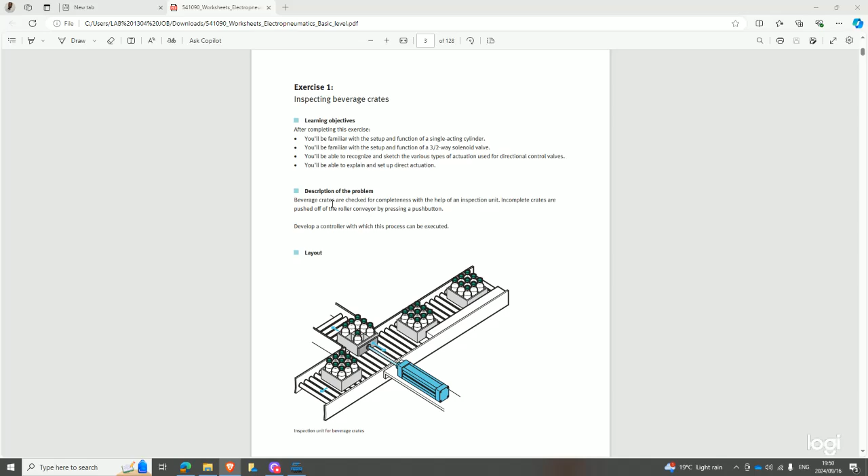As I just said, this is quite similar to pneumatics, but the difference is that now we are introducing electricity into the system. We are using electricity to actuate the pneumatic circuit. Now, to see how we do that, I want us to go over to FLUIDSIM. If you still remember, in pneumatics we've been using mechanically operated and pneumatically operated push buttons. In electro-pneumatics, we only deal with solenoid operated push buttons, right?

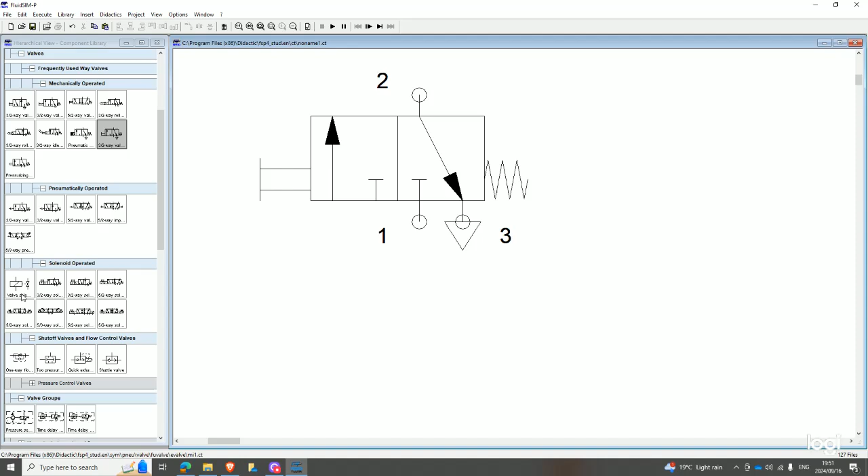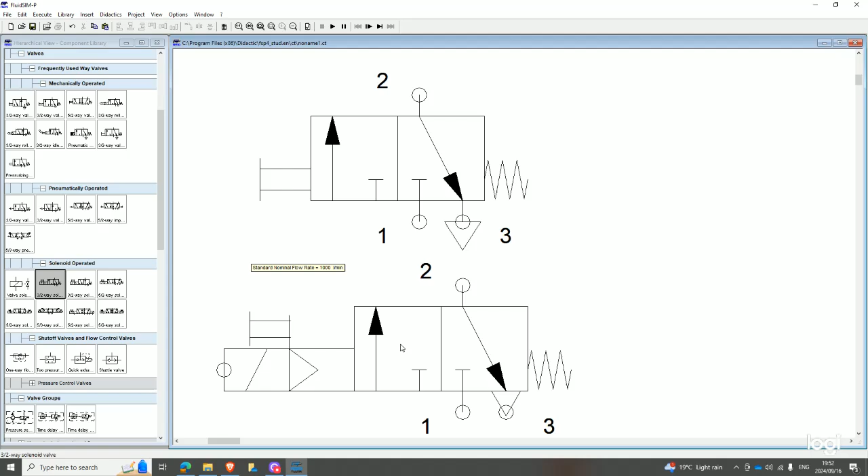Let me just make a comparison. Here in pneumatics, we used to have a manually operated 3-2-way valve that's normally closed. When we are dealing with electro-pneumatics, we also have a 3-2-way push button, but instead of being manually operated, it's electrically operated, which means on the side here, for it to be actuated, it has to connect to an electrical signal, right?

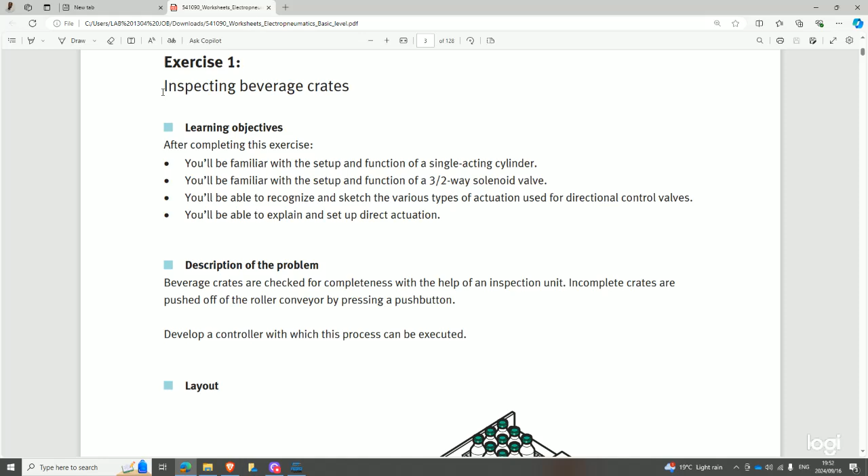So things are quite similar, but I'm gonna keep on emphasizing this: the only difference is that we are using electricity to control our circuit. So going back to our exercise 1, the process is inspecting beverage crates. They are saying beverage crates are checked for completeness with the help of an inspection unit, right?

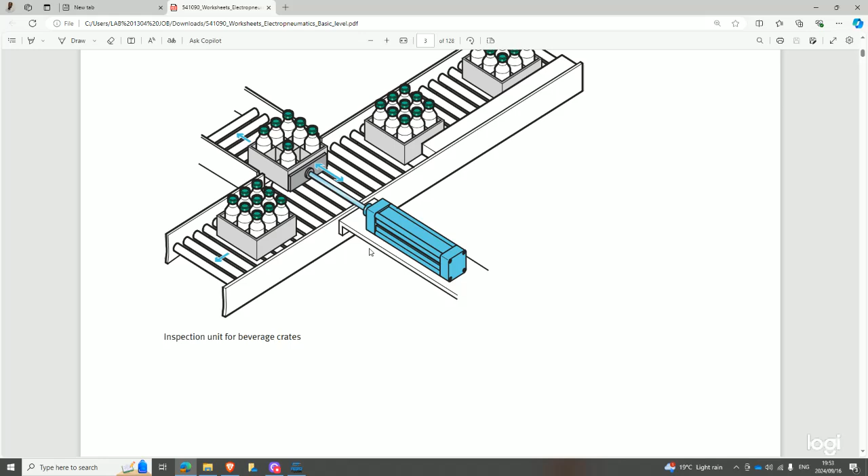And they are saying incomplete crates are pushed off the roller conveyor by a push button, and develop a control system in which this can be executed. So that's our description of the problem, right? What I also want us to catch is that, similarly to pneumatics,

the most important aspects here are the description of the problem, the description of the process, and the general conditions or parameters. Moving on to the description of the process, beverage crates are inspected at a manual workstation. After pressing a push button, incompletely filled beverage crates are pushed off the conveyor belt by a piston rod of a single acting cylinder. So first keyword: we already know that we are using a single acting cylinder.

And they're saying when the push button is released, the piston rod is retracted to the rear end position. So if you look at this, after pressing a push button, the incompletely filled beverage crates are pushed off the conveyor belt with the aid of the piston rod, which basically means that when the operator... let's stick with the operator.

When the operator presses the push button, the cylinder advances to push the incompletely filled beverage crates off the conveyor belt, right? And then as soon as the operator releases the push button, the piston rod retracts on its own to the rear end position, right?

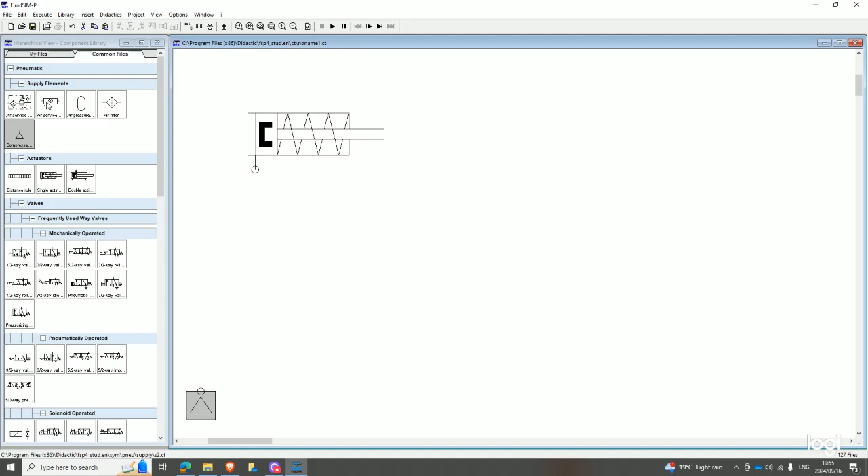So if you are controlling a pneumatic circuit, you always need to have your air service unit. You always need to have your compressor to supply the air, and then you need your air service unit so it can filter or clean the air, right? And then, as I said before, they already told us that they're using a single acting cylinder, right?

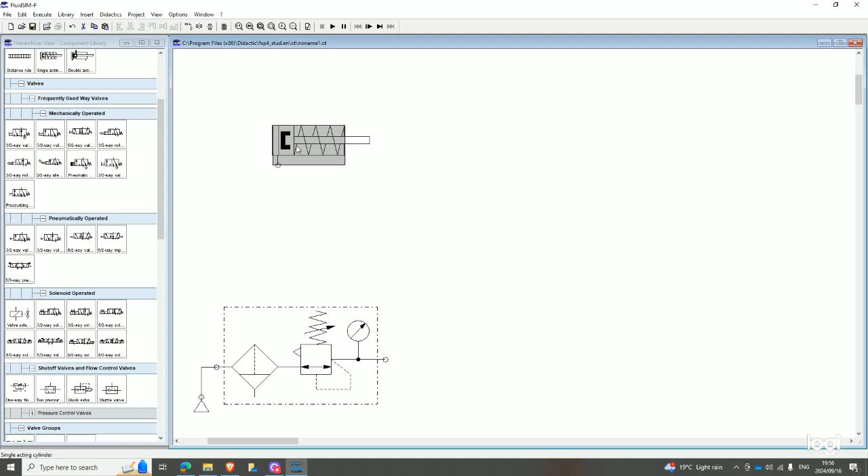And as I said, when we are dealing with electro-pneumatics here, we are dealing with solenoid operated valves, right? If you still remember, we have different kinds of solenoid valves. We have a 3/2-way solenoid valve that's normally open or normally closed. We have a 5/2-way solenoid operated valve. They only differ in the sense that the solenoid operated valves are used to control electronic signals, right?

And the mechanically operated ones are used to control pneumatic circuits, right? So since they said we're using a single acting cylinder, you should be aware that every time you use a single acting cylinder, you should have a 3/2-way valve. So now we're gonna get our 3/2-way. But we have two different kinds of 3/2-ways: a solenoid operated normally closed 3/2-way valve, and a normally open solenoid operated 3/2-way valve.

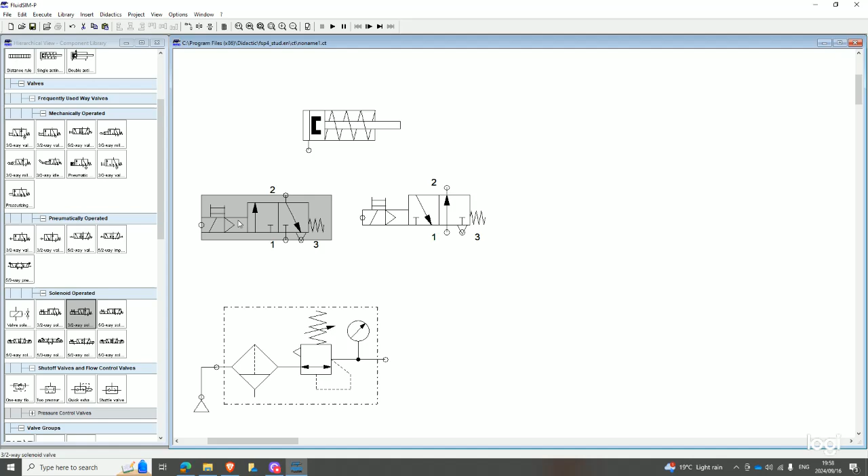So this one is the normally closed one, and this one is normally open. Going back to our statement, they said after pressing a push button the single acting cylinder advances, which means it begins in the retracted end position. If we use this 3/2-way valve, it's gonna allow air straight into the cylinder before we actuate it. So we are going to use this one to ensure that the cylinder remains in the retracted end position at the beginning of the process.

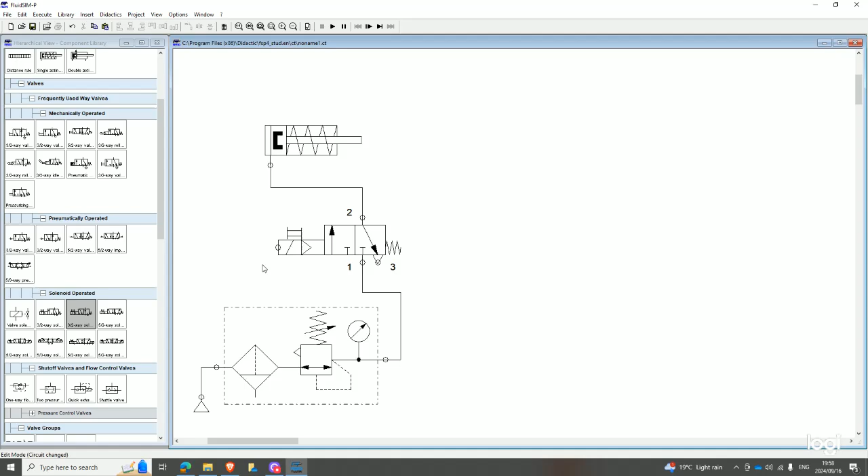So now I'm just gonna remove this, connect this here, and then connect this to my cylinder. And then I deal with the electrical aspect of my system. As you can see here, there's no push button; it's just where you put your electrical wires. So we need to put in the push button that you wanna press. Our push button is electric, right?

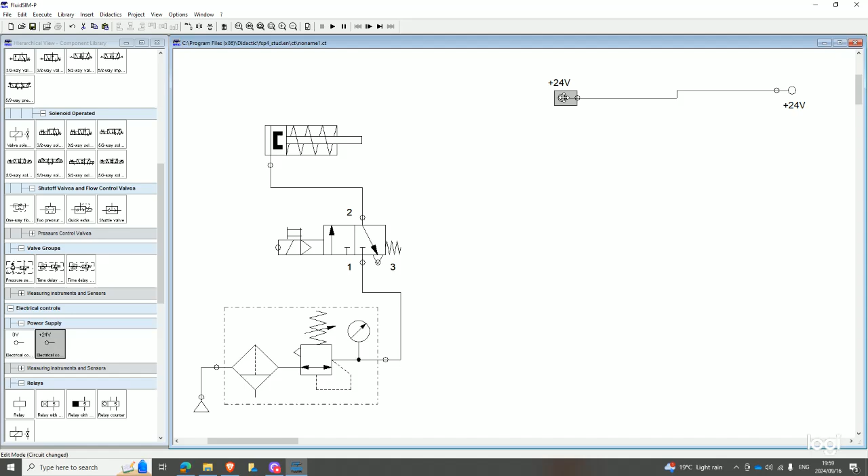So first we need to get a power source. Then you need to rotate this by 180 and connect it straight, right? And then you need to get your ground, or your 0 volt. Also take this, rotate it 180, connect it, and make sure you place it carefully.

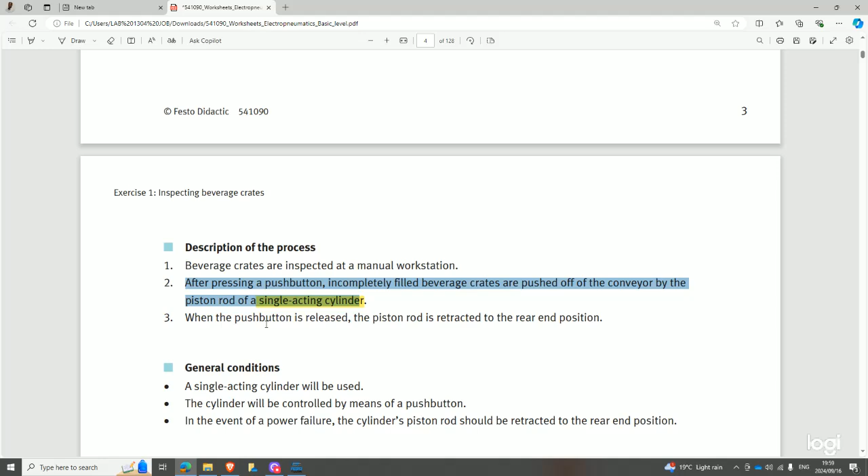So here they said we need to press the push button, and that's when the cylinder advances. And when we release the push button, the cylinder retracts. The electric push buttons are here. We have different kinds of push buttons that we'll go through throughout the course of this exercise.

But now, this is the push button. So what we do is take our push button. This is the kind of push button that closes when you press it, but as soon as you let go of it, it opens, right?

So after completing the exercise, I'll take you through how the other push buttons work, right? So now, to make sure that our electric circuit communicates to our pneumatic circuit, we need to get a solenoid, right? A solenoid valve. As I showed you, these cylinders are connected to a solenoid valve. So this is what a solenoid valve looks like. And then you connect it to the push button, and then you connect it straight to the ground, all right?

And then to ensure that they communicate, we label this, let's say, Q0, right? Q0. So now this indicates that this solenoid is located here. As I showed you when I was starting on the image, the solenoid is usually located at the front of this 3/2-way valve or whatever valve. And this indicates an electrical connection, so we're just trying to indicate that there's an electrical connection between them. And then we also label this as our push button, so we can say PB.

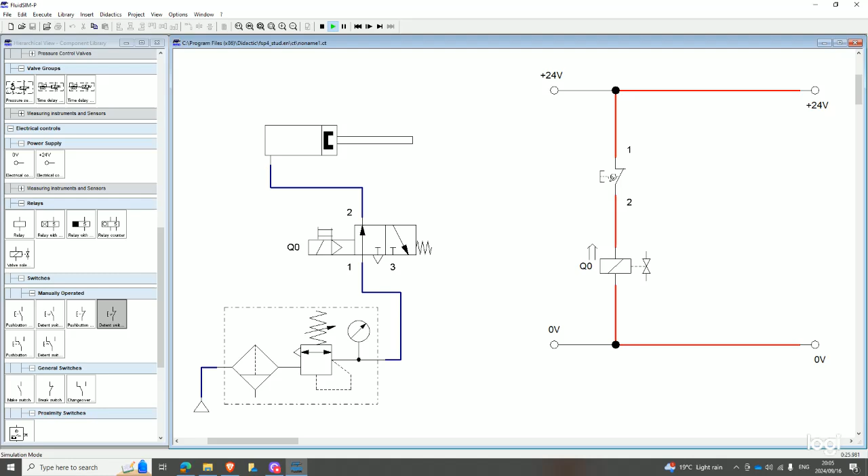And those are the different kinds of push buttons that we'll be going over, alongside maybe changeover switches. We'll also be using a changeover a lot. Anyways, moving on to exercise number 2.

Exercise number 2. Okay, so before I move on to exercise number 2, this is the solution for exercise number 1, right? So throughout me going over the exercises, I'll be going over some terms that I want you to understand, right? So make sure you note them down. So the first one that's relevant to this exercise,

it's direct actuation, right? So if you still remember from pneumatics, direct actuation was when the cylinder was directly connected to the push button, so that the push button could directly actuate the cylinder without having an intermediary component like a 5-way valve to pneumatically actuate the cylinder. So that's direct actuation in pneumatics.

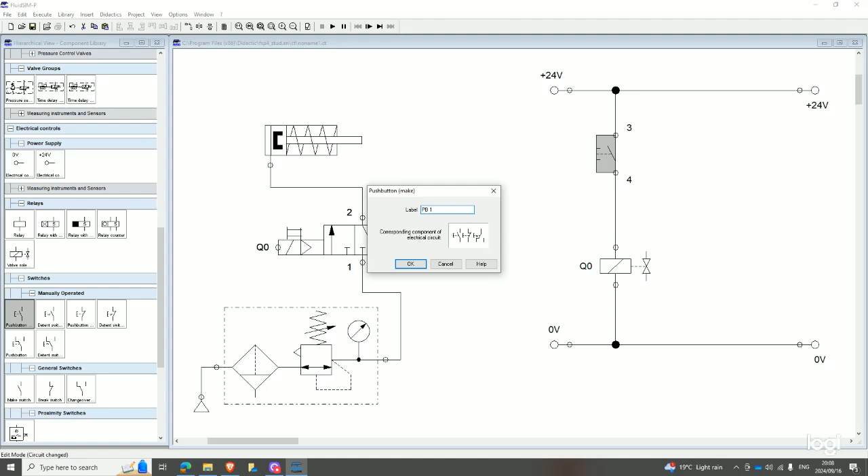And then, let's say I've labeled this push button 1. Now I can say when push button 1 is activated, an electrical signal is sent to the solenoid valve. And then when the solenoid valve receives the electrical signal, compressed air flows from the compressor into the 3-way solenoid operated valve. When the solenoid receives the signal, the 3-way valve is actuated to allow air into the piston rod, right?

And then after you let go of push button 1, the electrical current is cut from the solenoid valve, therefore resulting in the cylinder snapping back to its original position. The reason why it snaps back is because this 3-way valve is spring loaded. When it actuates to that side, it's compressing the spring, and when you let go of the push button, it automatically snaps back. So that's how you describe the control system sequence, right?

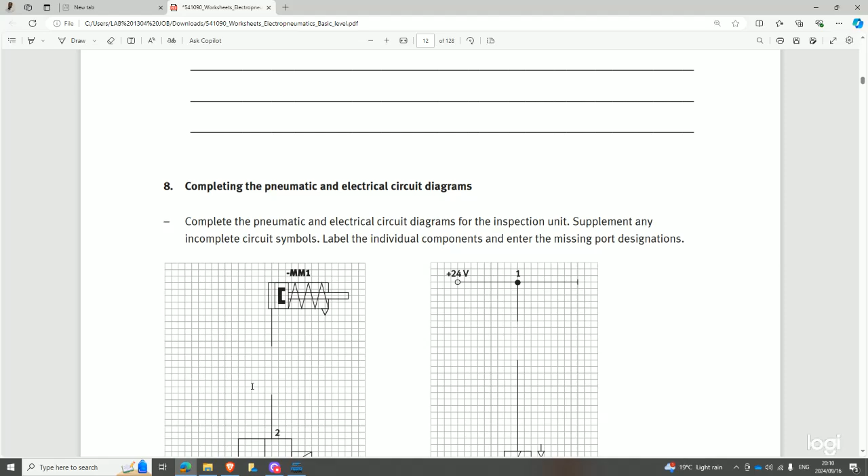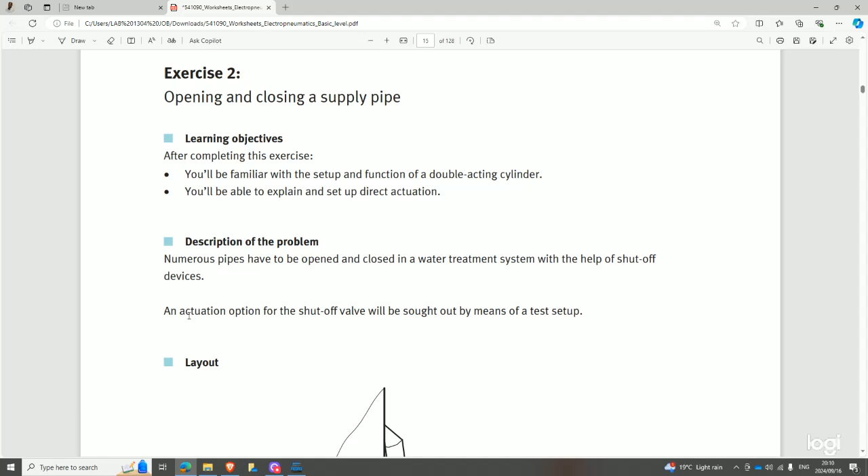So anyway, moving on to exercise number 2. Let me see. They are saying numerous pipes have to be opened and closed in a water treatment system with the help of shut-off devices. An actuation option for the shut-off valve will be sought out by means of a test setup. So that's the description of the problem. And then they are saying the gate is opened when a push button is pressed, and when the push button is released, the gate is closed once again.

And then they are saying a double acting cylinder will be used, and the cylinder will be controlled by means of a push button. In the event of a power failure, the cylinder should retract back to its original position. So if you go back to the description of the process, the gate is opened when a push button is pressed, which means the cylinder advances when you press the push button. And when the push button is released, the gate is closed again, which means the cylinder retracts, right?

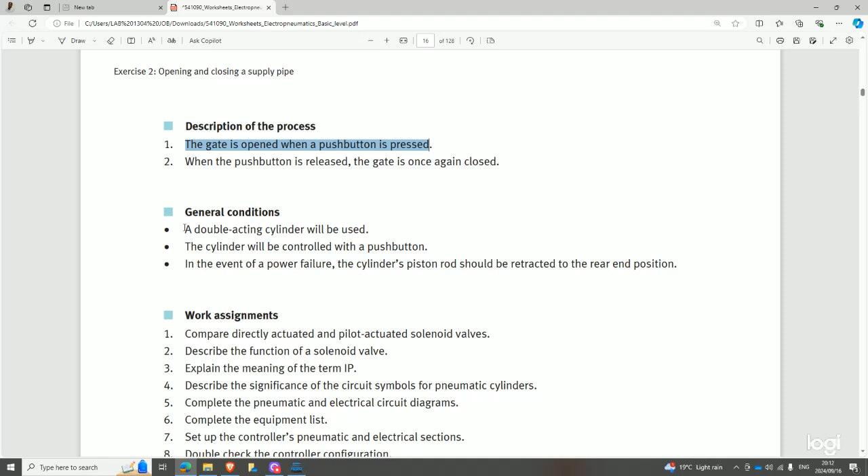So now, since they already told us here as well that we'll be using a double acting cylinder, right? So coming back here, we're gonna remove this, and like this. So now, since we already said we are using a double acting cylinder, as you remember from pneumatics, we can't control a double acting cylinder using a 3-way. So every time we need a double acting cylinder, we always need a 5-way, right?

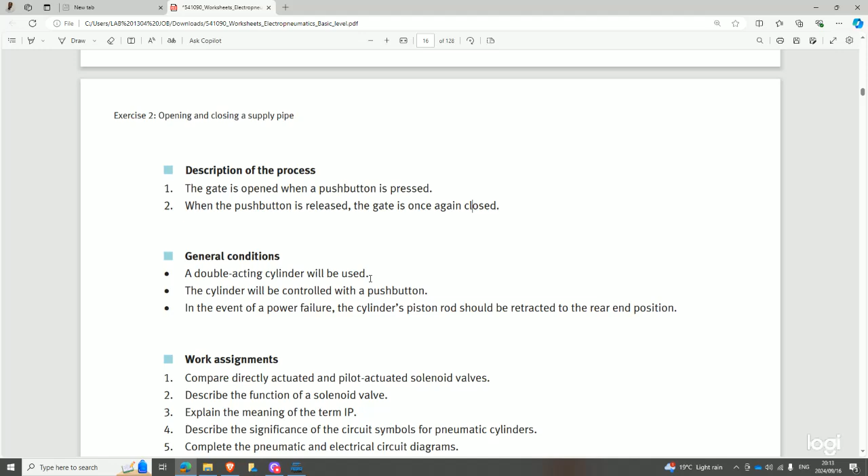So now going back here, as you see, they are saying the gate is open when the push button is pressed. And then the second statement says when the push button is released, the gate is closed once again. Which means the type of push button, or the type of 5-way that we'll be using, doesn't have a latching mechanism, which means it has a spring that's gonna snap it back when we let go of the push button.

So now we have this 5-way, and then we also have this 5-way. This one, I can say it's a bistable solenoid operated 5-way. A bistable 5-way can be electrically actuated on two sides, which means if you want it to advance and retract, it's only actuated by means of two signals, and it has a latching mechanism. And if you look at our statement, they said when you let go of the push button, the gate closes on its own. Otherwise you'd need to press a secondary push button.

And so now this solenoid valve is only actuated on one side, and it has a spring on the other side, which is gonna cause it to snap back. So when the electrical signal is cut when you let go of the push button, this spring is gonna cause the solenoid valve to snap back to the standard position on its own. And this one, since it has a latching mechanism, can't do that. So this is the 5-way solenoid valve we'll use.

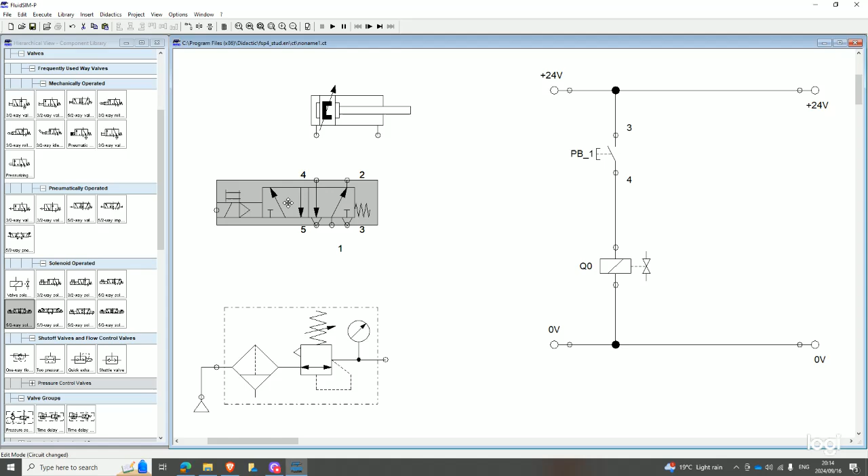And then we connect it to our double acting cylinder, and then we connect it to our compressor and our service unit. Similar thing: as I said, this is the solenoid part of your 5-way valve. For them to communicate, you'll also label this Q0. And now when you simulate this, we press it, the cylinder advances, and when you let go of it, it goes back on its own. So that's how you operate a system using a double acting cylinder.

So now this side, I didn't change it because they said we're still using the push button. If you look at the type of push button, it's a type where you have to press and hold it. Once you let go of it, it cuts the supply going to the cylinder. And now moving on to exercise number 3. In exercise number 3, the description of the problem is saying, let me check.

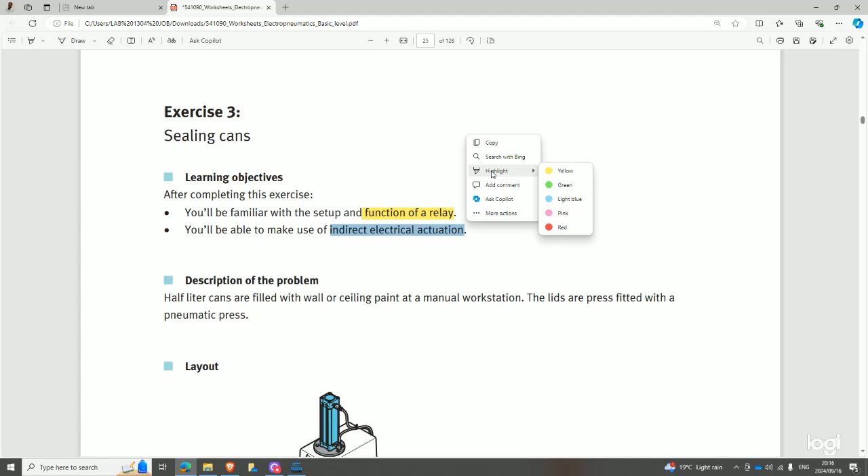Exercise number 3. If you still remember, I said there are terms that I want you to be familiar with. So here, what I want you to be familiar with is the functioning of a relay. You need to understand how a relay works, and you also need to understand indirect actuation, so you can note that down. Those are some of the things I want you to understand.

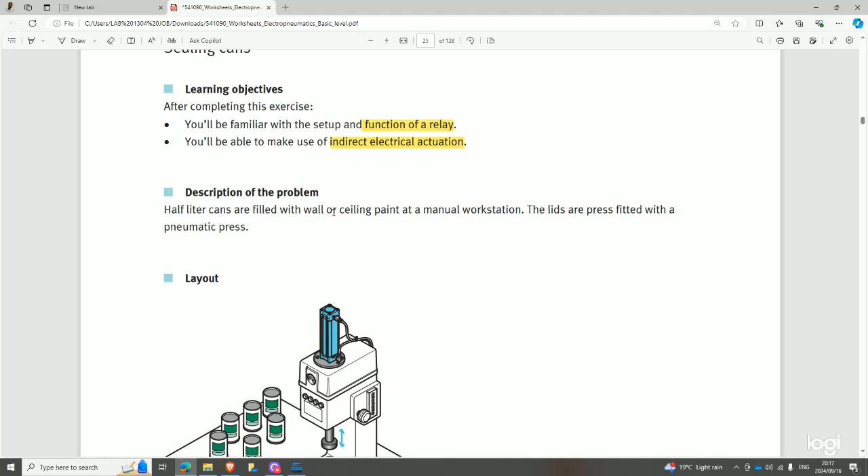So here, the description of the process is saying half-liter cans are filled with wall or ceiling paint at a manual workstation, and the lids are pressed with the aid of a pneumatic press. The cans are inserted manually into the press, and after pressing a push button, the press cylinder is advanced to press the lid.

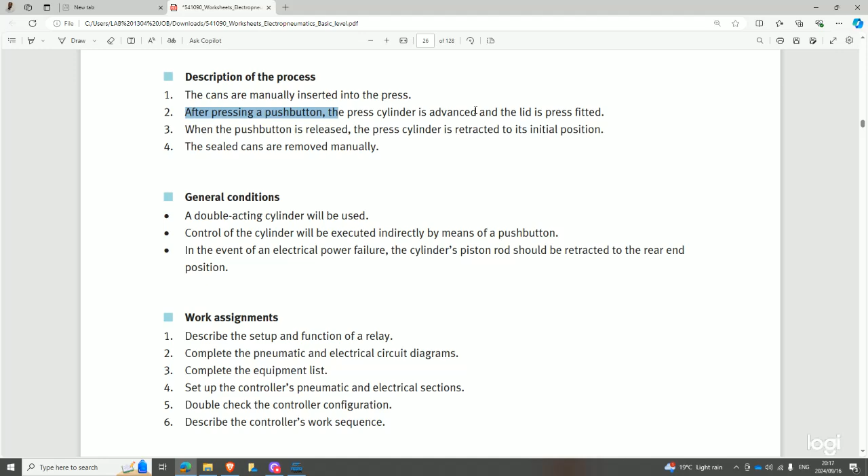They're saying the press cylinder is advanced to press and the lid is fitted, which means when you press a push button, this cylinder advances to press the lid here so that it's tightly secured, right? And then they're saying when the push button is released, the cylinder retracts back to its initial position. And then the sealed cans are removed manually. And then the conditions: a double acting cylinder will be used, right?

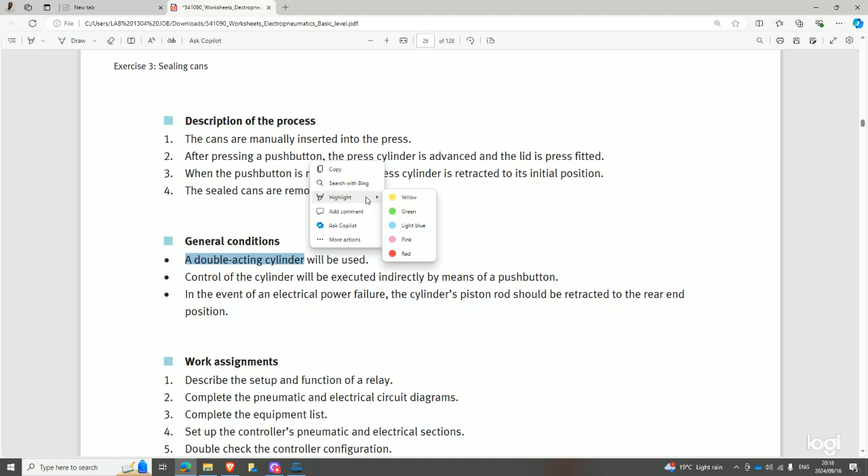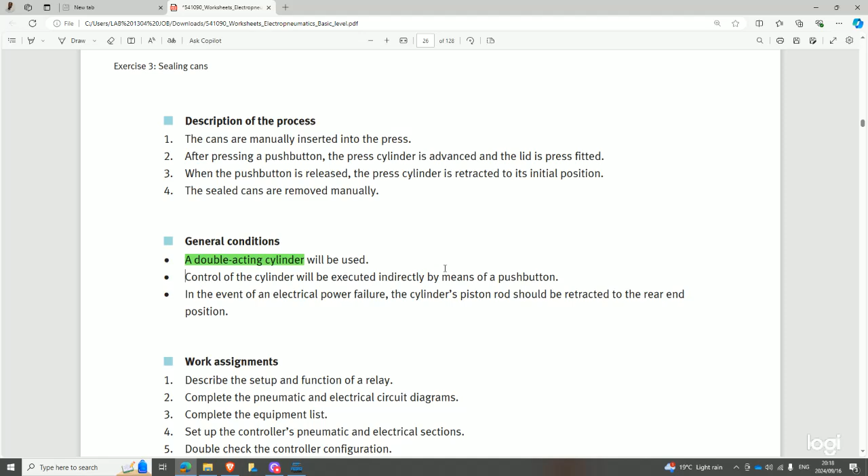And then they're saying the control of the cylinder will be executed indirectly by means of a push button. So this statement is also a key statement, right? They are saying the cylinder will be controlled indirectly. So it's indirect actuation, right? And then the last parameter: in the event of a power failure, the cylinder should retract back to the original position, right?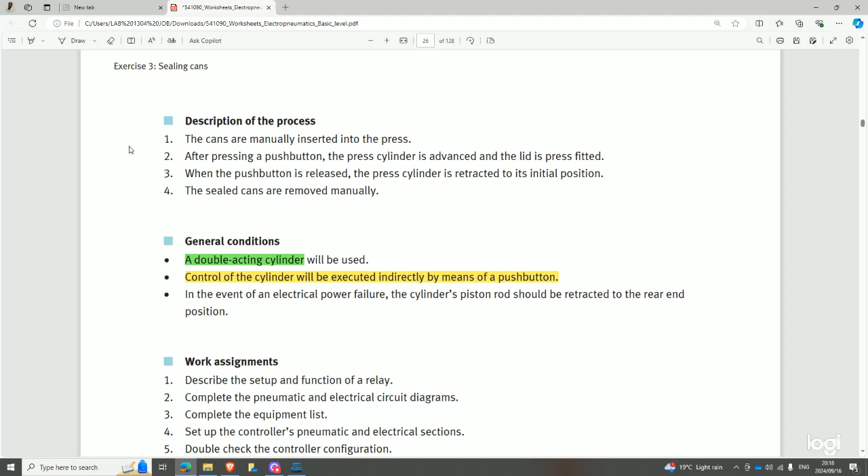So here, they're saying when you press the push button, the cylinder advances to press the lid, and when you release the push button, the cylinder retracts to its original position, which means you are still using the same push button that cuts the current that's going to the solenoid, right? But now, since they said the cylinder will be actuated indirectly, we can't connect the push button straight to the solenoid, right?

Because if you still remember, when I explained indirect, I said direct actuation is when you connect the push button directly to the solenoid valve so that it directly supplies current to the solenoid valve, which can actuate the cylinder, right? But in certain instances, for example,

Just give me a second, I'm just trying to look for an example online that I can use to explain what I mean. Power station. So now I'm back. I found a suitable example that you can use to understand, right?

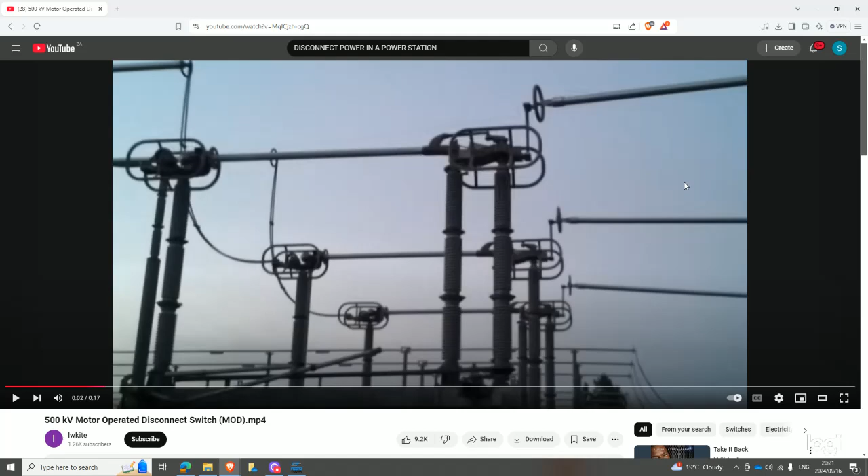So in power stations, every time they cut the power for load shedding, right? So these are switches. I'm gonna just play this video, then I'm gonna explain after, right? Okay.

So the video that I just showed you, as you can see, they are disconnecting, they are cutting power between systems, right? But as you saw, how much electricity came out of those connections when they cut power, when they're trying to open them. You saw how much current passed through.

So in bigger circuits, or in much more complicated systems, let's say this solenoid requires maybe 1,000 volts, right? You can't connect a switch directly to the solenoid, because switches or resistors, if you still remember from electrotech, have a maximum amount of voltage that they can take. So let's say your solenoid valve required 1,000 volts for it to turn on, but your switch is a 24-volt switch. So you can't connect this directly to here.

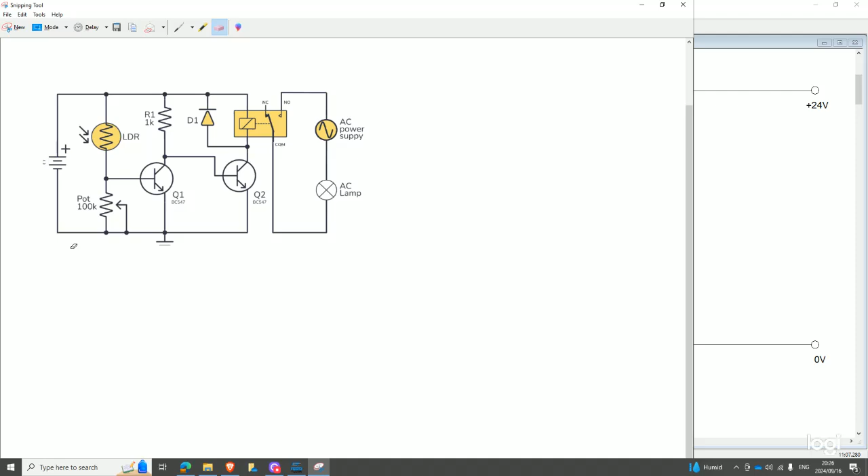So let's say, for example, I had a circuit, a switch here. I close the switch, the circuit is complete, and then current goes to the relay, right? And when the relay receives that 24 volt, it sends a signal to this switch telling it to close, so that maybe, let's say, 1,000 volt current is supplied to the system, so that now you don't burn the components that are in this other part of the circuit. So that's why you use a relay. I hope you understand, right.

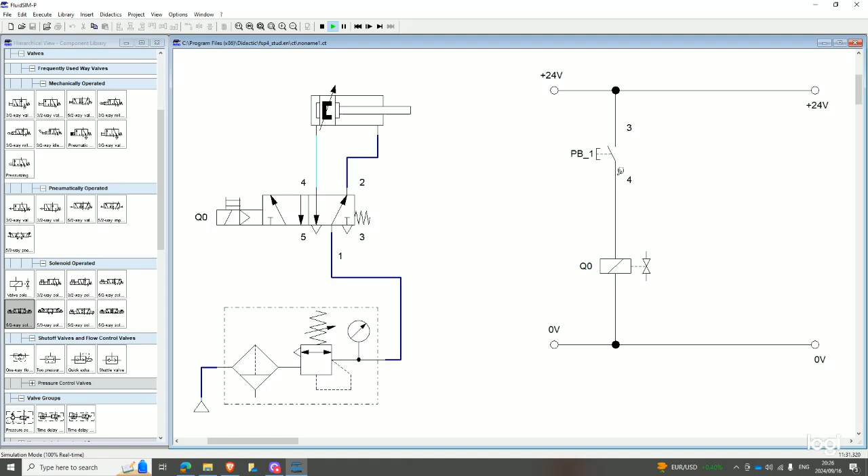So if I can explain for one last time, connecting a push button directly to a solenoid valve that requires high voltage, it's gonna always burn it, or it might cause safety issues for you to connect it direct. So now, how you connect a relay here: you remove your solenoid from this side, and then you get a relay. This is gonna be your relay. You connect it to the push button, to here.

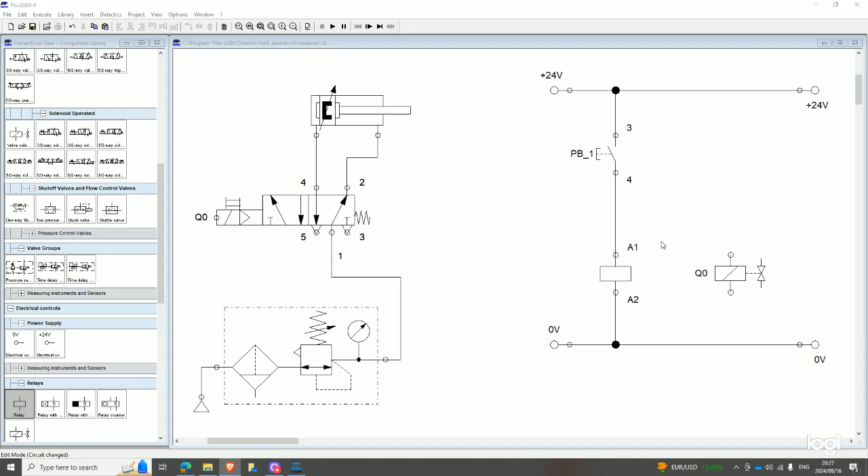Now after you connect it to your push button, you get what you call a changeover switch. A changeover switch is used for communication with your relay. So now your changeover switch looks like this, and then you connect it straight to power supply, and then you connect it to your solenoid, and then you connect it back to your ground, right.

Unfortunately the version of FLUIDSIM we are using only has 24 volt. In a manner of speaking, this was not supposed to be connected in the same circuit, but for the sake of the exercise we'll continue like this because our FLUIDSIM is 24 volt. So now, as I showed you, you're creating two different circuits. So how do you get your relay to send a signal to your changeover, or your Q2? You define your relay as R1, and then you also define your changeover as R1. This indicates a physical connection.

So how is your circuit gonna work now? You wanna press the push button. And when you press the push button, the circuit closes and current is supplied to the relay. When the relay receives that signal, it sends a signal to the changeover switch telling it to close, and when this one closes, it's sent to the solenoid valve, indirectly actuating the cylinder. So this is indirect actuation in the context of electro-pneumatics.

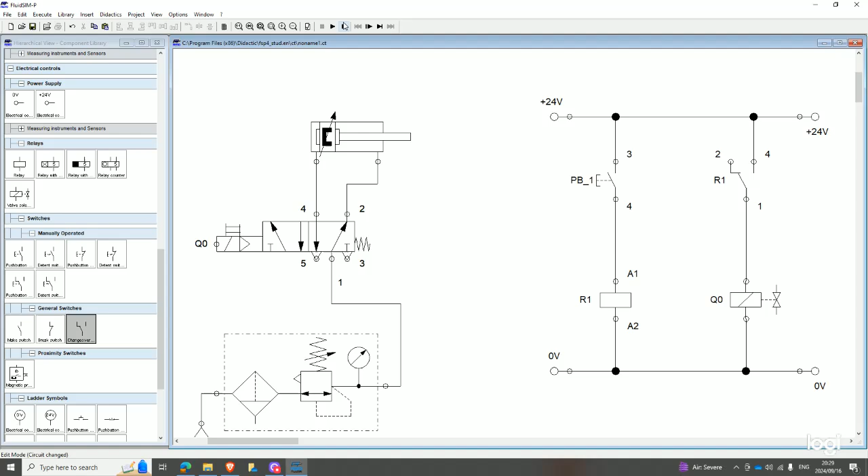So now if I simulate this, if I press this push button, as you can see, it only now closes. Current is sent to the relay, and then the relay sends a signal to the changeover switch telling it to close, so current can be supplied to the solenoid valve. So that's indirect actuation, instead of us supplying current straight to the solenoid valve.

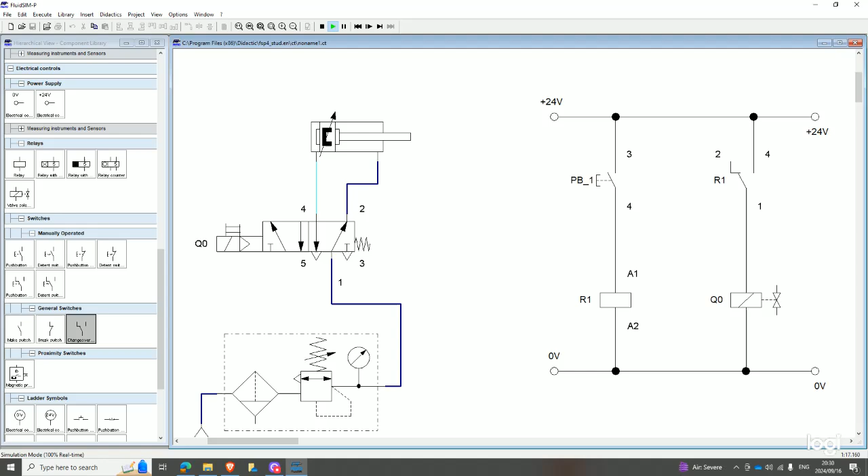So think of indirect actuation like this: instead of supplying current direct to the solenoid valve, now we press the push button, and current is supplied to the relay. When the relay receives an electrical signal, it sends a signal of its own to the changeover to tell it to close. And when the changeover closes, the current is sent to the solenoid valve, therefore actuating the cylinder. So I hope now you understand how indirect actuation works, and also how you can describe the control system sequence of this system.